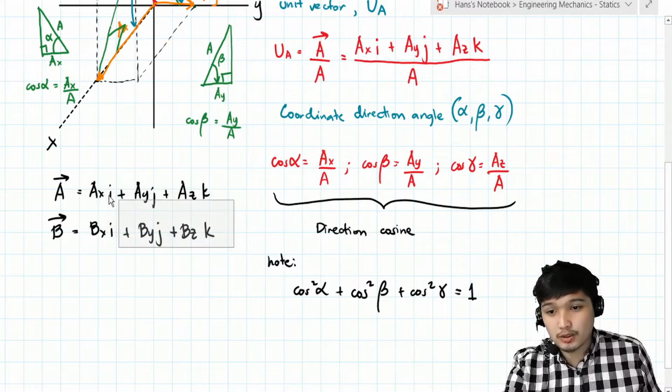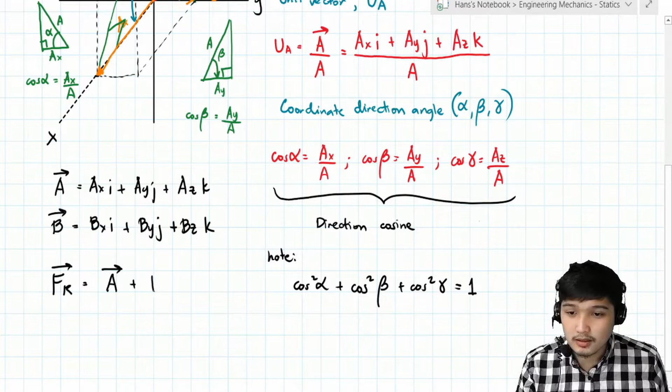And, kung may dalawang force, para makuha natin yung resultant force, so tawagan natin yung FR, is just equal sa vector summation ng mga forces natin. So, magiging A plus B. So, para ma-add yun class, meron yung I plus J plus K. So, dito, sama lang natin lahat ng forces along X, itong mga Ax saka Bx. Dito, lahat ng forces along Y, Ay, By. And then dito, sum lang natin lahat ng forces along Z, yung Az saka Bz. So, yun na yun, class. This vector now represents yung ating resultant force.

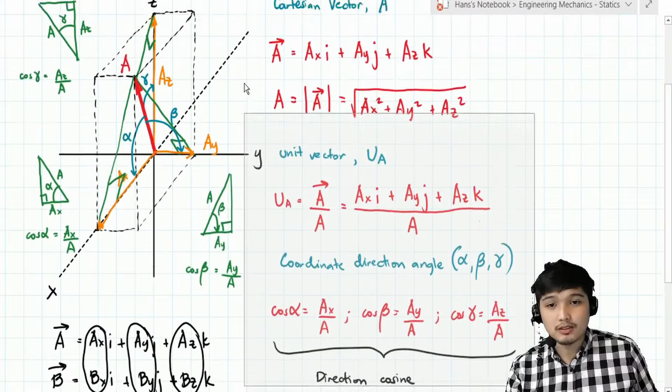Okay, so, almost the same lang, no? Yun nga lang, nagkaroon lang tayo ng analysis and presentation using vectors. Okay, so nagets ba class? Nakasunod? Okay, so kung nakasunod, we're ready na to apply this concept sa ating sample problems. Okay, so ayan, situation 9. From the figure shown below, express the force as a Cartesian vector in Newton and determine the coordinate direction angles of the force. So, zoom in tayo, class.

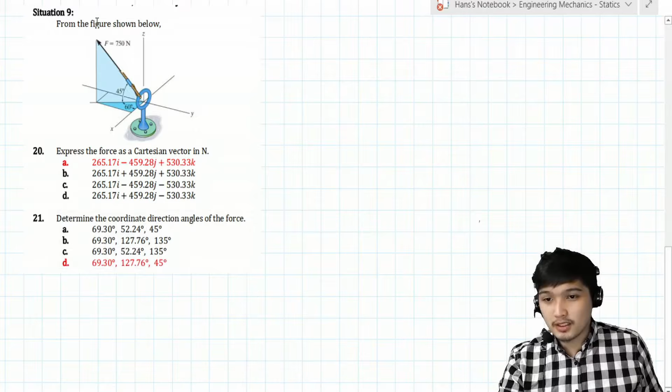So, take note, class, yung mga angle provided dito does not represent yung coordinate direction angle. So, wait lang bago tayo pumunta doon, kunin muna natin yung mga components niya. So, kung ito yung total force natin, yung components niya is ito. Ito yung Fx. Andito yung Fy. And then, somewhere here, andito yung Fz. Yung Fz na yan is yung height ng triangle. Tapos ito naman, dimension ng horizontal triangle, ito yung Fy. And then, dito sa likod, ito naman yung Fx.

So, we can solve individually yung mga components na yan. So, simula tayo saan, class? Sa Fz siguro, no? So, paano kukunin yung Fz? Consider mo tong triangle na nakatayo, with given angle na 45. So, therefore, papuntang positive z-axis. So that is 750 sine of 45. So with that, ilan ang Fz? 530.33. Pwede na yan.

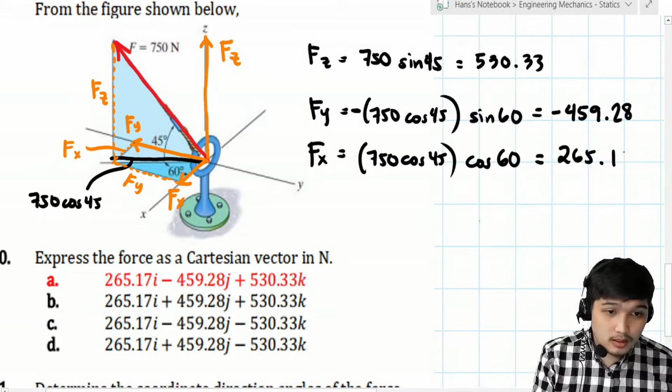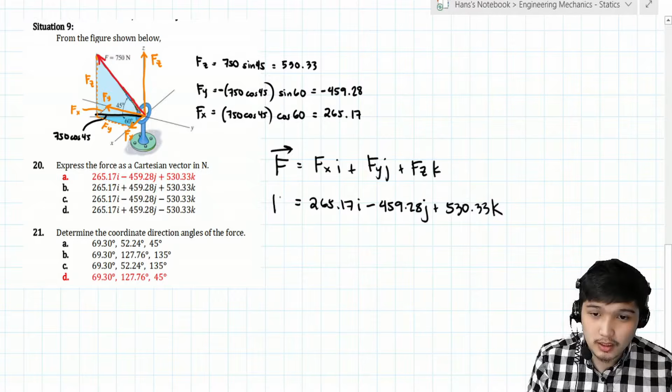I hope na nagets niyo yan, yung ginawa natin. So, therefore, the Cartesian vector ng force F ay equal saan? Fx i plus Fy j plus Fz k. So, just simply plug in yung values. 265.17 i and then minus 459.28 j and then plus 530.33 k. So, this one now is our Cartesian vector and this one is letter A.

Letter A. So, correct. So, next we have determine the coordinate direction angle. So, di ba class, pag kinuha natin yung unit vector nung F, ano mangyari doon class? That is yung Cartesian vector then divided by yung magnitude ng force F. Okay? Or in numerical value, kunin lang natin to, then divide it by the magnitude ng force F. Ang magnitude is 750 over 750.

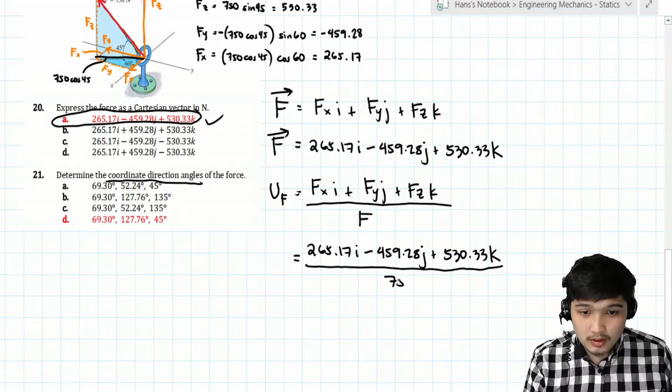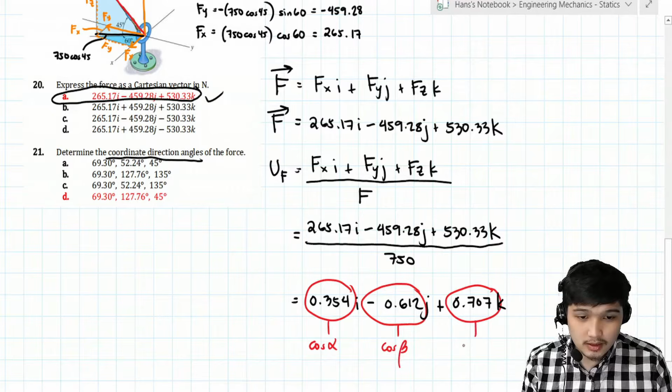So, simplifying this one, magiging 0.354 i minus 0.612 j and then plus 0.707 k. Okay? And then note, 'di ba sabi natin sa previous discussion that yung mga values presented dito represents yung direction cosine. So this one represents cosine alpha. This one represents cosine beta. And then ito represents cosine of gamma. Tama ba? Kadi-discuss lang natin kanina. So yung mga individual values, equal sa cosine.

So dito. So with that, kaya na natin kunin yung mga values ng alpha, beta, saka gamma. So alpha equals arc cosine of 0.354. Check na natin, marami na tayong rounding off na ginawa eh. Malapit pa ba sa choices? So this one is 69.27. Okay, so lahat sila pare-parehas pa nung alpha. So punta tayo sa beta. Beta equals arc cosine of negative 0.612. Beta equals 127.73 degrees. So mukhang ito na yung tumutugma, yung letter D. Pati pala yung letter B, pwede pa, lumalaban pa.

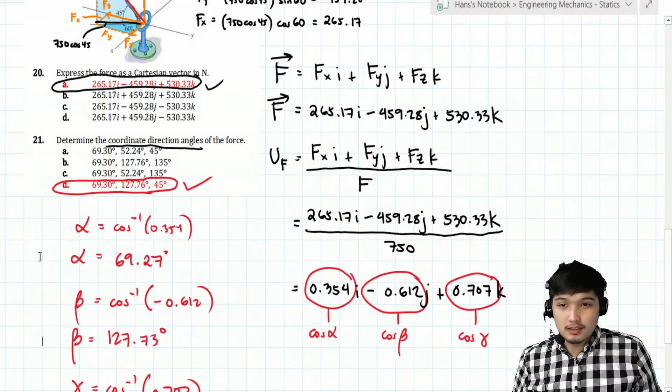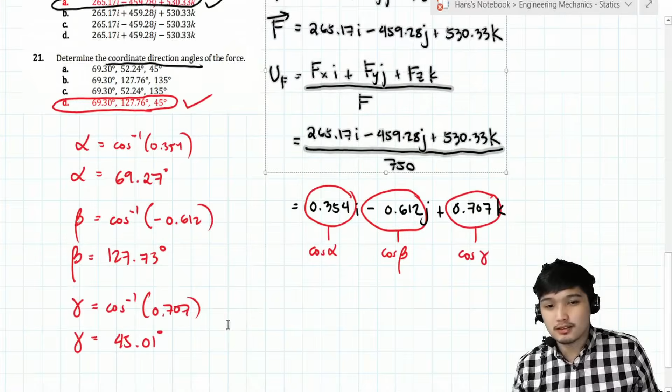So no choice, kunin natin yung gamma. So gamma equals arc cosine of 0.707. Gamma equals 45.01. So with that, we can say that the correct answer is letter D. So correct. Nagets niyo ba yung ginawa natin, class? Isang force pa lang yan, conversion ng force dun sa equivalent vector niya, saka yung mga direction angles niya. So, proceed tayo sa next problem.

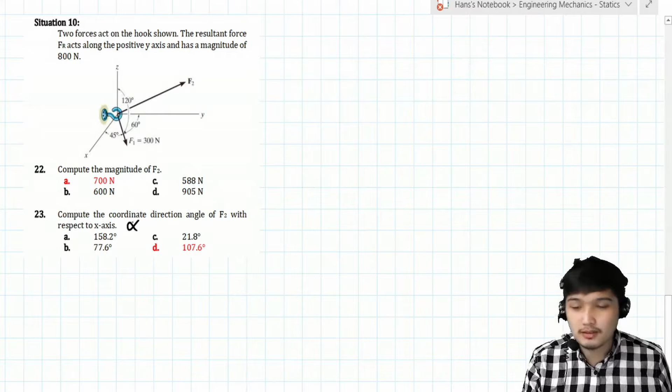Okay, so situation 10, two forces act on the hook shown. The resultant force Fr acts along the positive y-axis and has a magnitude of 800. Compute the magnitude of F2. Compute the coordinate direction of F2 with respect to x-axis. So, ang tinatanong dito sa 23, yung with respect sa x-axis, yung alpha. So, zoom in tayo.

Yung F1, may value siya. Meron din siya mga direction angles. So, from x, check. From positive y, check. From positive z, check. Ito yung alpha 1, beta 1, saka ito yung gamma 1. Okay, so very simple, mape-present natin yung F1 into its equivalent Cartesian vector. So, gawin nga natin yon. Paano makukuha class? Kunin muna natin individually yung mga component. So, yung F1x equal saan?

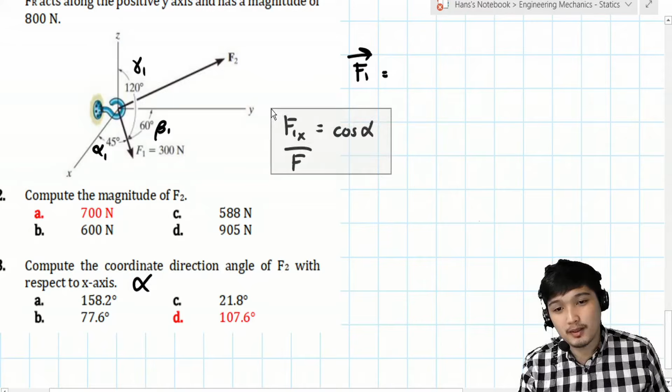Since may mga given tayong angle, pwede natin gamitin yung cosine. Recall that cosine is equal sa component over the magnitude. So, yung along x equal sa cosine alpha times F. Di ba originally, over F. Nare-recall nyo pa ba? Balikan nga natin. Ayan, cosine is equal sa component over the magnitude ng total force. So, ganun din dito. For alpha, component over total force. Kaya itong force, lipat na lang natin dito. So that is 300 cosine of 45.

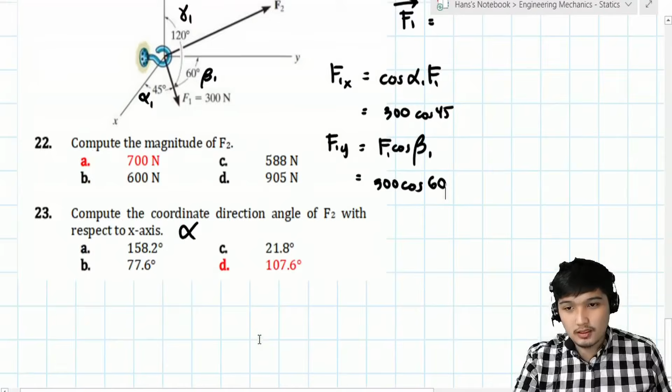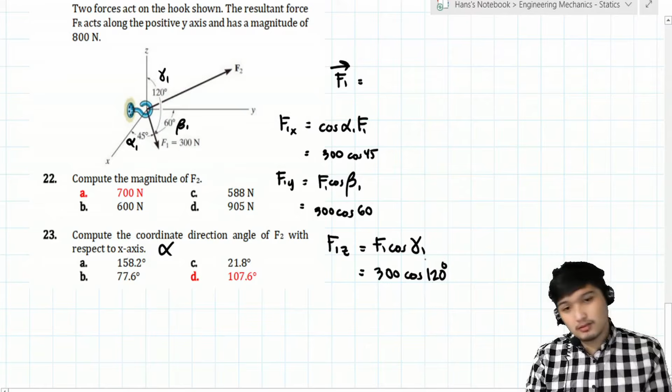Okay, so for F1y, that is F1 cosine of beta 1. So magiging 300 cosine of beta 1, 60. So next, z component, F1z. That is F1 cosine of gamma 1. So that is 300 cosine of 120. Okay, wait lang.

Ayan. So therefore, para masolve natin yung Cartesian vector niyan, that is equal sa F1x i plus F1y j plus F1z k. So therefore, F1 equals 300 cosine of 45 i plus 300 cosine of 60 j plus 300 cosine of 120 k.

Okay, tapos yung F2, wala naman kasing given sa F2. So yung F2, sulat lang natin siya ng ganito. Imaginein natin meron siyang mga component: F2x component i, plus F2y component j, plus F2z component k. Hindi kasi natin alam yung mga components niya.

Ngayon, ano yung sinabi sa ating class sa problem? Ang sabi sa atin is that the resultant force acts along the positive y-axis and has a magnitude of 800. So parang pag pinagsama mo yung F1 saka F2, ito yung combined effect nila. So ito yung FR, which is directed towards positive y-axis, 800 Newton. Ibig sabihin class, kung i-present natin yung FR into its equivalent Cartesian vector: 0i plus 800j plus 0k.

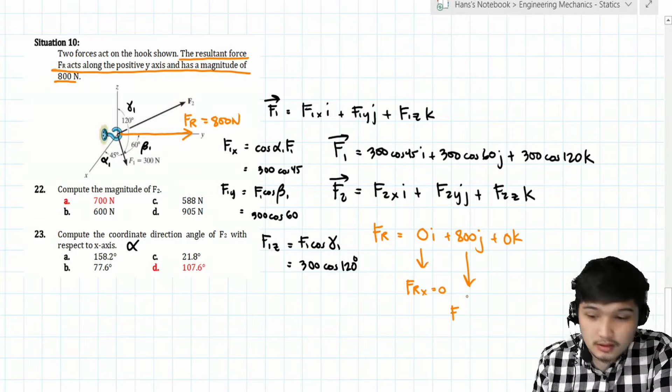Gets ba? Kasi sinabi nga, di ba, ito ba't nag-0 to? Kasi wala nga siyang x component, di ba, na yung FR along x is 0. Walang sinabi. Pero ito kaya naging 800 kasi, nakikita pa ba yung sinusulat ko? Yung y component nung resultant force is exactly 800, no? Kasi nga towards dun siya, dun siya papupunta. And then yung z, alam mo na rin, di ba, dahil yung z component wala, so 0.

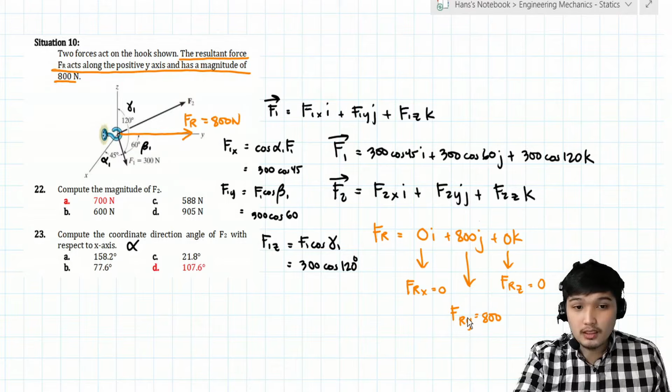Okay, so yun na yung class, no? Sana nakakasunod pa kayo. Medyo masakit lang sa mata, lalo na class kapag hindi tayo praktisado na nag-vector. Kasi commonly nakikita natin class 2D forces lang. Pero minsan pahirap si examiner eh, so what if maka-encounter ka ng 3D force? So mas maganda, alam mo na kung paano ginagawa.

Okay, kakalmahan mo lang class kapag ganyan para hindi tayo prone sa error. So sabi natin, para ma-solve yung resultant, equal yun sa vector summation, parang F1 plus F2. Parang ito yung sinabi natin kanina kapag may two forces na, A and B. So para makuha yung resultant, vector summation ng A and B, at para makuha yon, sum mo lang lahat ng X individually, sum mo lang lahat ng Y individually, sum mo lang lahat ng Z individually.

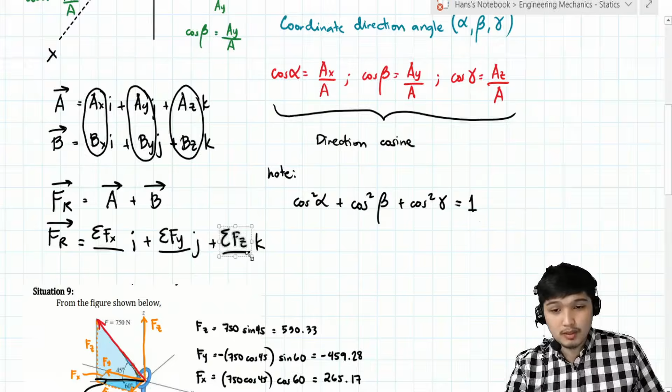So in that case, parang lumalabas dyan class, kung titingnan natin itong sinulat ko dito, so focus kayo dito. Dapat yung sum neto, pag pinag-plus ko yan, dapat equal yan sa 0. Pag pinag-sum ko to, dapat equal yan dito. Then also this one, equal yan sa 0. Okay, so yun na yung clue natin, no?

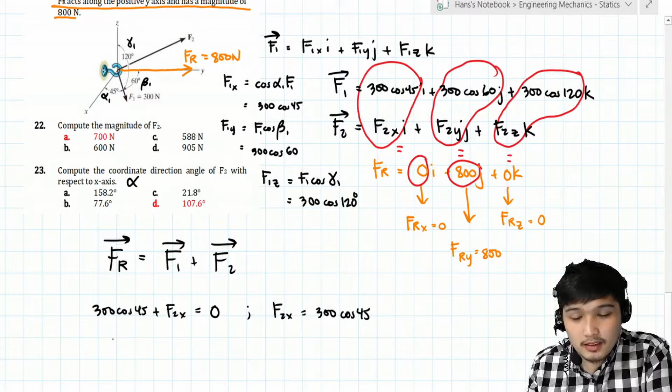So for the first part: 300 cosine of 45 plus F2x dapat 0. So therefore, F2x equals negative 300 cosine of 45. Next one: 300 cosine of 60 plus F2y dapat equals sa 800, so F2y now equals 800 minus 300 cosine of 60. And then lastly, 300 cosine of 120 plus F2z dapat maging 0, so therefore F2z equals negative 300 cosine of 120.

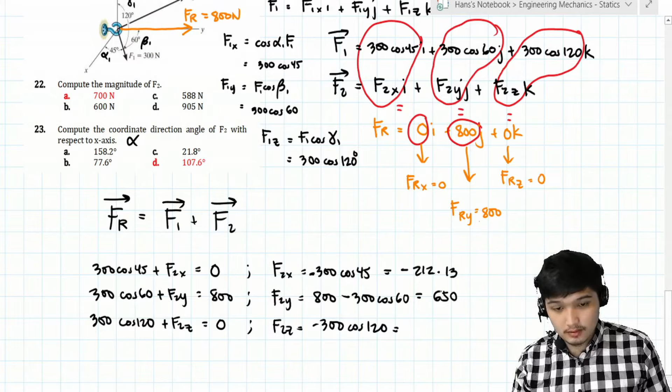So gets ba yan? So with that, kunin na natin class yung value nito, simplify na natin. Ilan yung mga components along x and y and z ng force F2? Itong una dapat may negative, so negative 300 cosine of 45, negative 212.13. Ito ilan? Magiging 650. Ito is 150. Okay, so nasolve na natin individually yung mga components niya, no?

So therefore, we can rewrite yung Cartesian vector F2 equals sa negative 212.13i plus 650j plus 150k. So para makuha yung magnitude ng F2, absolute value ng vector F2 or yung Pythagorean: negative 212.13, 650 squared plus 150 squared. Ilan yung magnitude niyan, class, F2? Okay, so sagot is 699.999, or dahil sa rounding up lang yun, siguro yung sagot dyan is exactly 700 newtons.

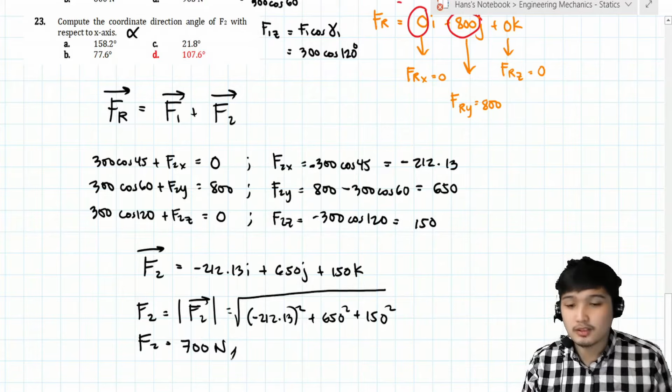Okay, so nasa choices ba yan? Okay, so correct, letter A, correct.

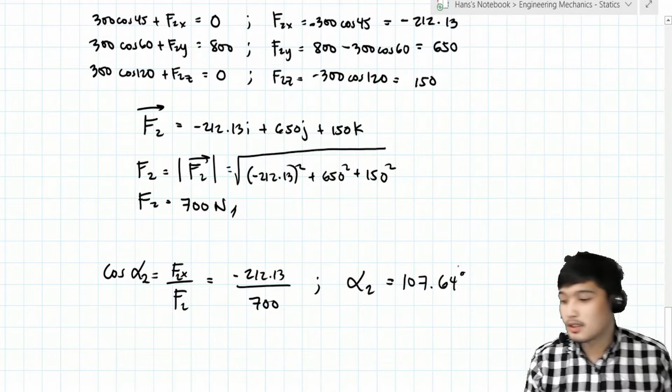Next, compute the coordinate direction angle or with respect sa x-axis. So tinatanong nga itong lambda or yung alpha. To solve for the alpha, note that cosine of alpha equals sa fx over yung force. Kung halimbawa, ang tinatanong is yung alpha nung force 2, so F2x over F2. Simply kunin lang natin yun: negative 212.13 over 700. Using that one, we can solve for the alpha 2, that's equal sa 107.64 degrees. So nasa choices ba yan? Okay, 107.6, so we are correct.

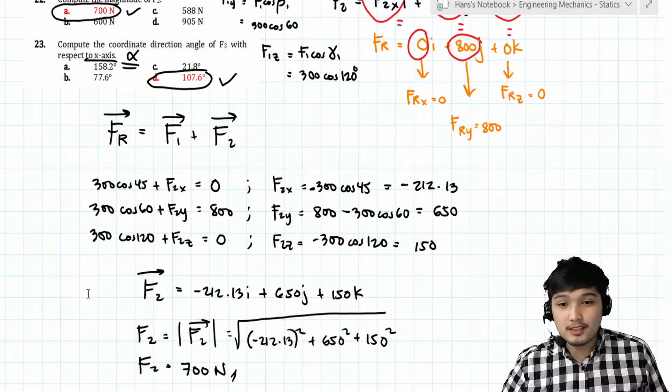Okay, so yan, nandiyan pa ba kayo? So ang hirap nun ng 3D. Pero ayun lang class, practice lang ng practice.

Okay, nandyan pa ba kayo? So practice lang natin, no? Di ba hinahanap natin yung B. So solve for B, that is what? C minus A. So simply, i-model lang natin to sa calculator, sa vector.

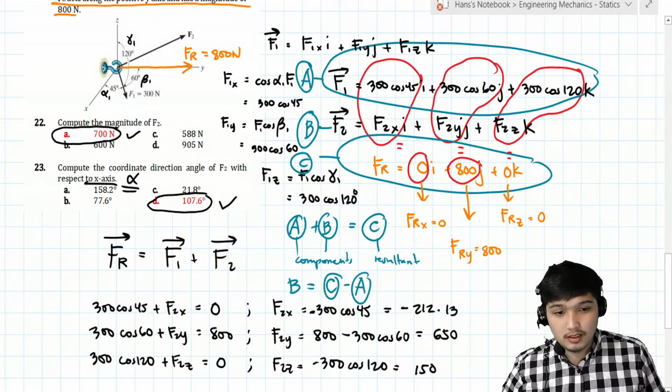Sige, i-adjust ko lang tong screen ko.

So ano tayo? A vector, so that is A, so vector A tayo. Makita mo yung vector class hanggang 4 lang. So vector A represents yung force 1.

At saka lagyan natin 300 cosine of 45. Ito, 300 cosine of 60. Ito is 300 cosine of 120. Okay, so that is vector A.

At tapos yung resultant, dito tayo sa vector C, sa 5. Ay teka lang, dito sa data, vector C, at saka 1. So sabi natin, 0 component along X, 800 component along Y, 0 component along Z.

Okay, so therefore, subtract na lang natin, no? C minus yung A. So ilalabas na yan, class, no? Yung sagot natin kanina, nandito na yan: 212, 650, saka 150. Tama ba? Ayan, no? 212, 650, saka 150.

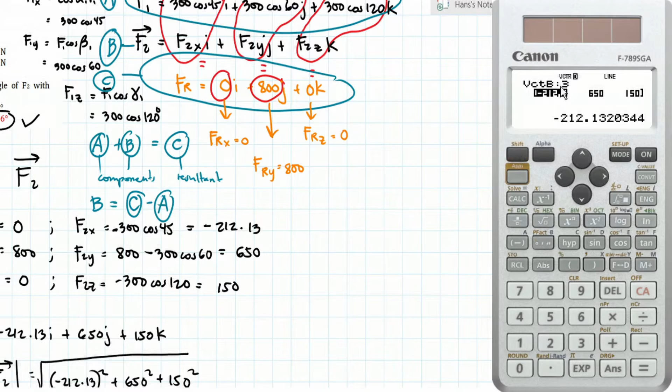Alam ko, class, pwede itong i-rectang store sa B. So try nga natin, shift store B. Ayan, no? Nasa vector B na siya.

Okay, so di ba class, gusto natin kunin yung, halimbawa, ito, yung magnitude. So para makuha class yung magnitude, anong gagawin? Sabi, pag calculator gagamitin, absolute value, so para siyang absolute value ng vector B. Ayan, no? 700, no? Nakuha na natin yung magnitude.

So next, ito. Paano makukuha to, class? Pwede natin gawin dito class, kunin natin yung unit vector. Okay, we said that the unit vector, let's say nung F2, ay equal yun saan? Sa Cartesian vector niya over yung magnitude niya.

Or kung sa calculator yan, para yung 'di ba ito nasa to? Vector B, at tapos itong magnitude parang to, yung absolute value ng vector B. Okay, so makakapag-present tayo ng unit vector. So ayan, sana nagigets nyo.

So more on syntax lang naman eh. So wag mo tatandaan yung syntax class, kasi ang tatandaan mo yung konsepto, saan ba nanggaling yan. So yung sa taas, Cartesian vector, yung denominator, yung magnitude.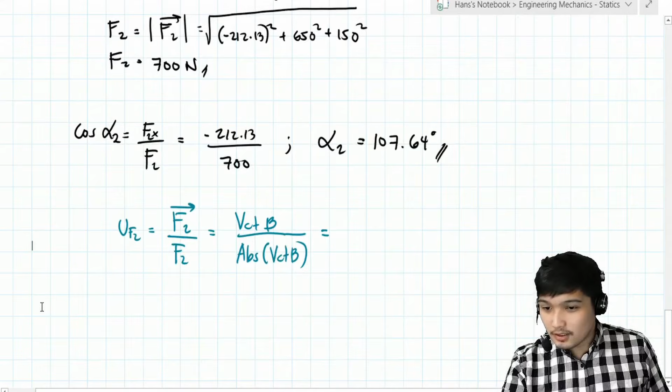So yun, using even yung ibang values doon, masolve pa natin yung iba pang hinahanap na angles. Okay, so yan. Nag-guess nyo ba? Or na-appreciate nyo ba yung ginawa natin sa calculator? Okay, so next tayo class, tingnan natin kung gets natin. Okay, so ito.

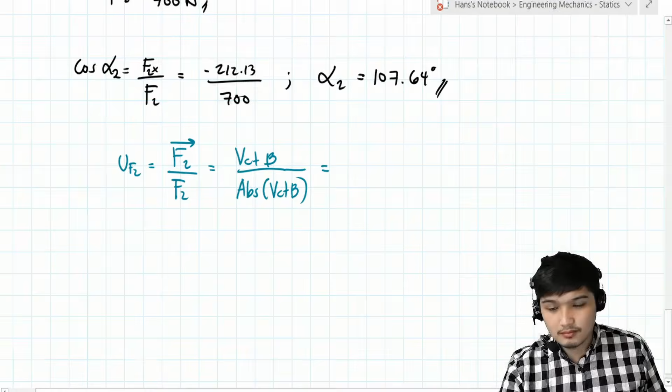Situation 11. From the given pipe assembly as shown, so there are two forces, F1 at F2. So tinatanong calculate the magnitude of the resultant force. Then calculate the coordinate direction angle ng resultant force. So para makuha natin yun, class, simple lang, yung resultant force FR, just simply the vector summation ng F1 and F2.

So therefore, una natin munang kailangan gawin is i-present yung mga Cartesian vector nila. So yung F1, paano yun class? Parang yung F1, meron siyang, so palit na tayo kulay, meron siyang X coordinate or X component, at meron siyang Z component, no? Pero wala siyang Y. Tama ba? So alam mo na yung class, paano kunin yung niya?

Yung X component, so rerekta ko na dito yon. So that is 600 times 4/5. Tama ba? And then towards the positive x-axis, so positive, at lagyan natin ng I. At tapos plus, wala siyang Y component, so 0J. At tapos meron siyang Z component pataas, so that is plus ulit, plus 600, at tapos that is 3/5 naman, at K. O yun na yun class, nasulat na natin yung Cartesian vector nung force F1.

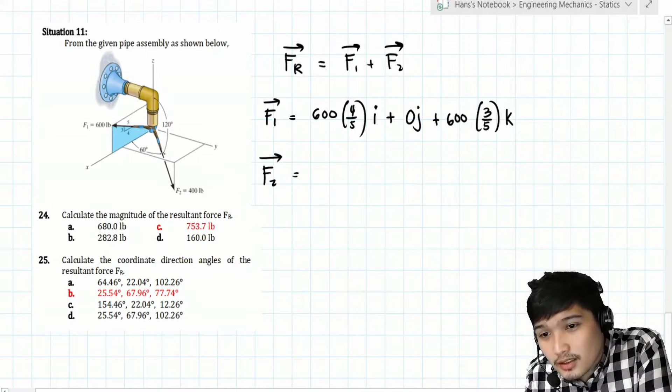Next, F2. O paano yan? So in that case, ang mga given sa kanya class, is zoom in tayo. So di ba parang etong 60, ito yung niya, angle with respect sa x, so para siya yung alpha. Etong 120, siya yung angle with respect sa z, so siya yung gamma. O anong nawawala, class? Wala siyang angle papuntang y. Wala siyang beta. Paano kaya yung class walang beta?

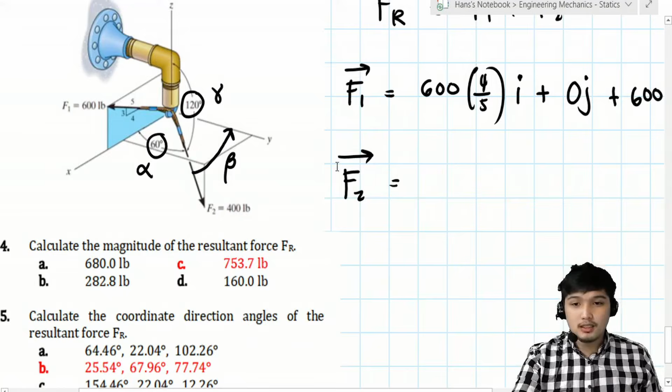So recall again that the relationship is what? Cosine squared alpha plus cosine squared beta plus cosine squared gamma equals sa 1. So simply plug in lang natin. O ilan yung magiging ano niyan, beta? Okay, so ganun pala masasolve, no? Una kala mo susuko ka na, ay kulang yung given. Ay hindi class, kailangan alam mo tong ano, yung relationship ng mga angle. So ilan yung ano niyan, class? Beta niyan.

Okay, so lumalabas yung angle beta is 45 degrees. So therefore, pwede na nating i-present yung force F2 into its equivalent Cartesian vector. Yung una, para sa x component, that is yung total force and then cosine alpha 60. Saan siya papunta, class? Papunta siyang positive x-axis. Hindi mo na kailangan isipin yung class kasi yung magde-determine nun yung angle na. Siya na mag-state kung positive value or negative value, so long as yung angle na provided mo is yung mga angle measured from the positive x, positive y, positive z.

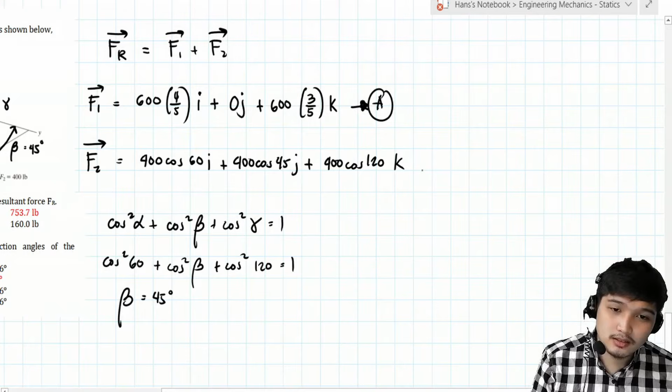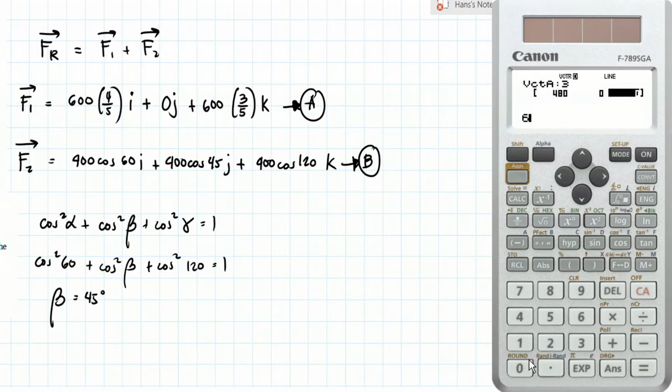So sige, punta tayo sa calculator. Apps, data 1, at baguhin natin, gawin natin 600 times 4/5. Ay, hindi pala nakikita yung pinipindot ko. Ito na. So balik na tayo. Vector, 600 times 4/5, 0, 600 times 3/5. Okay, next vector B, 400 cosine of 60, 400 cosine 45, 400 cosine 120.

Okay, so just simply add the vectors, vector A plus vector B. So whatever yung value represents yung resultant. So ano ba yung mga tinatanong dito? Magnitude. Okay, di ba ginawa natin ito, parang ito yung sa C is equal sa A plus B. So na-store na ba natin sa C? Store muna natin, or naka-store na. Hindi ko ma-recall, ulit natin, store sa C, para sure. Okay, so para makuha yung magnitude, paano gagawin? Absolute value ng, wait lang, labas tayo dyan. Absolute value ng vector C. Okay, so the sagot is 753.7. So that is letter C.

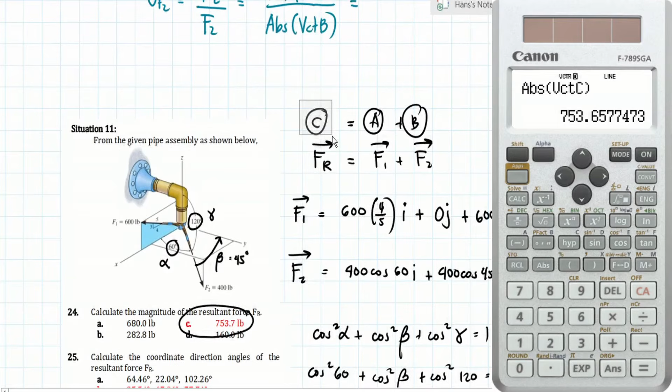O bakit naging ganyan? Kasi di ba sabi natin unit vector equals sa Cartesian vector niya yung force C natin over yung absolute value. So wait lang, bakit naging C? Kasi nga in-store natin sa C ito. Okay lang, baka nalilito kayo ha, so palitan nga natin to. Yung unit vector nung resultant, ay equal sa Cartesian vector nung resultant over yun sa magnitude nung resultant. Where in that case, yung Cartesian vector ng resultant is ni-store natin sa C, vector C, and then yung magnitude niya is equivalent sa absolute value nung vector nung nasa C.

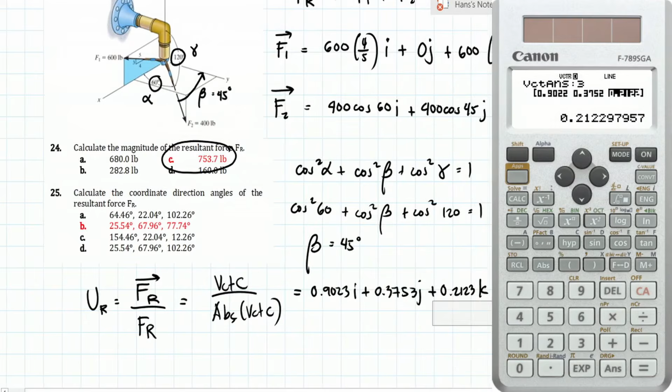So, in that case, makaka-generate tayo ng vector na magre-represent ng mga direction cosine. So, gawin natin yan. Vector C divided by absolute value ng vector C. Okay, so sulat lang natin yan: 0.9023 I plus 0.3753 J plus 0.2123 K. Ayan, di nakita. So, I think pwedeng hindi ko na gamitin yung calculator.

So, sabi natin, yung unit vector represents, di ba? Itong una, yung cosine of alpha. Ito is cosine of beta, and then ito is cosine of gamma. So therefore, we can solve for individual alpha, beta, and gamma. So, kaya nyo na yan, class, no? Arc cosine mo na lang isa-isa. So, arc cosine of 0.9023, this one is 25.54. Next is arc cosine of 0.3753, so this one is 67.96. And lastly, 0.2123 ay 77.74 degrees. So therefore, from the choices, ang tumugma dyan is yung letter B. Okay, so that is now our answer.

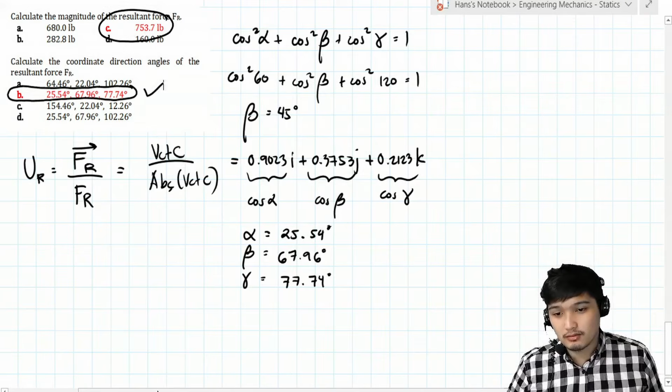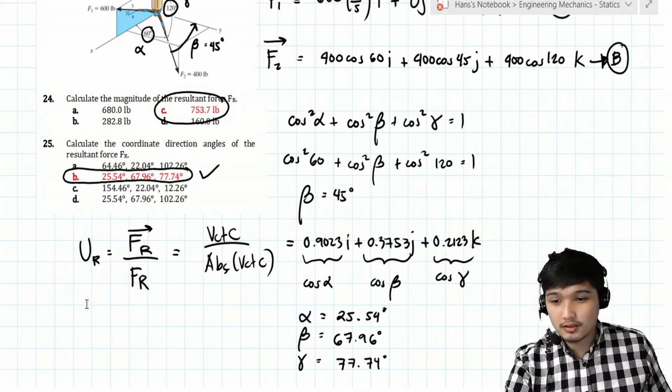Okay, so nakakasunod ba kayo, class? Medyo, talagang completely different no yung atake ng pagso-solve sa mga 3D forces, unlike sa 2D na medyo simple lang siya, no? So ito kailangan ng focus at kailangan alam yung mga konsepto. Okay, so hopefully nakakasunod kayo, guys. So I think last problem na tayo regarding sa 3D forces, concurrent 3D forces. So, copy ko lang. Wait lang, guys.

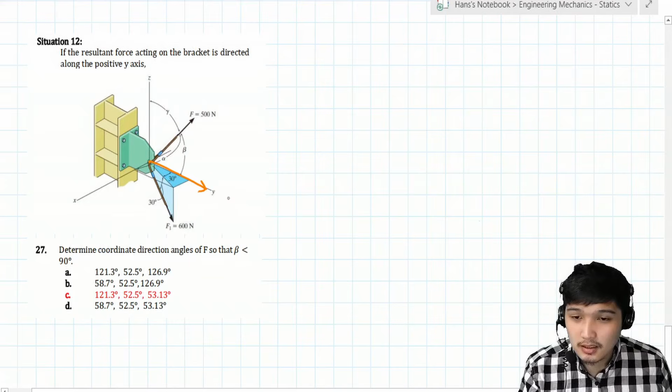So, anyways, last problem na to. Situation 12, if the resultant force acting on the bracket is directed along the positive y-axis. So ang resultant niya is papuntang positive y. Ito yung FR. Yung vector niyan is 0i kasi wala siyang x component, plus j component which is yung summation ng mga forces along y, plus 0k kasi wala rin siyang z component. So ginawa lang natin yung Cartesian vector representing yung resultant force.

So tinatanong is what? Natakpan. Wait lang. Nasaan yung tanong? So, ito yung kompletong tanong. Una, determine the magnitude of the resultant force FR, and determine the coordinate direction angles of F so that beta must be less than 90 degrees.

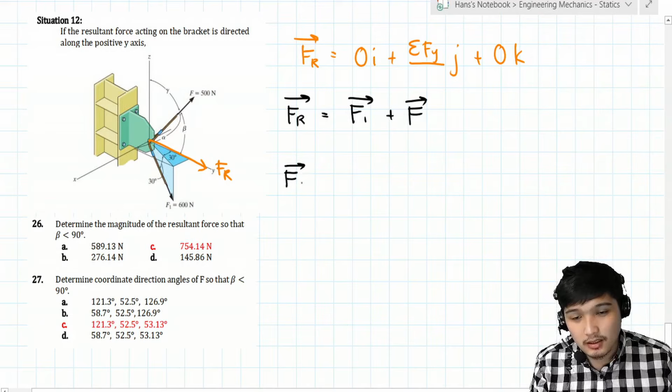Simplihan lang muna natin. Para makuha yung resultant, that is just the vector summation ng F1 plus yung isa pang force na F. May dalawa kasing force, F saka F1. Para ma-solve natin, i-present natin yung mga Cartesian vectors nila. Para sa F1, check natin tong figure. Meron ba siyang x component? Meron, ito yung x component ng F1. Paano kukunin yun?

So, 600. Yung line na to equals 600 cosine of 30 considering the figure. Para makuha to, 600 cosine of 30 tapos another 30, which is sine 30. This one is i, positive kasi towards the positive x-axis. Next, yung papuntang y. Imagine mo lang kung saan papunta yung force. Andito yung y component. To solve for that, kailangan natin tong line na to and then 30 ulit, which is cosine naman. So plus 600 cosine of 30 times cosine of 30 j.

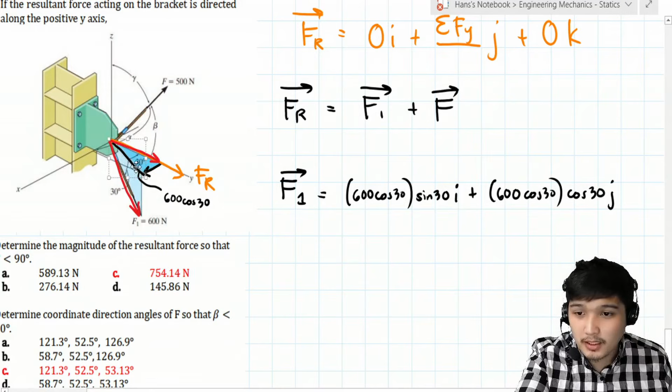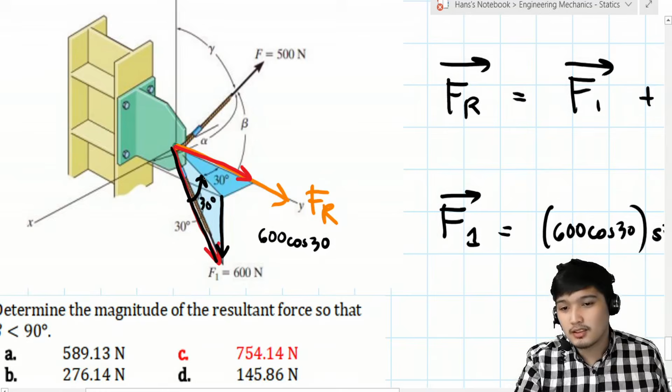And then meron siyang z component which is pababa. Ito yung z component niya. That is negative. Delete ko lang to. Oops, nawala. So ito yung z component niya, downward, negative. Para makuha yan, that is 600 sine netong 30 degrees. Sana nasundan guys. So minus 600 sine of 30 k.

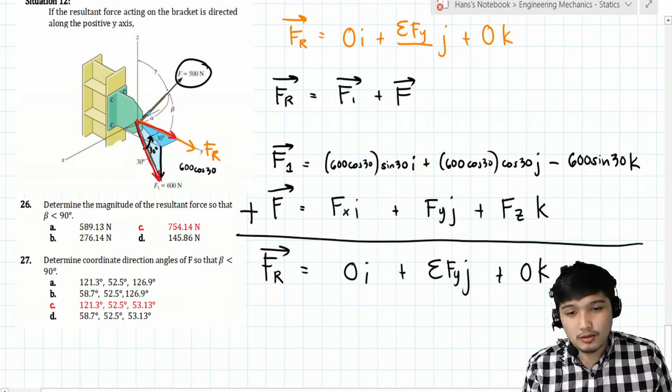And then let us represent yung F, walang F2, since wala siyang given na direction. So simple as Fx i plus Fy j plus Fz k. Ano yung gusto kong palabasin? Kapag pinag-plus mo sila, magiging equal sila sa Cartesian vector nung resultant na 0i plus summation ng Fy j plus 0k. So from that, we have a clue na gagamitin natin tong una para makuha yung x component.

So simplify natin to. Medyo mahirap pag mahaba pa yung sinusulat. This one is 259.81. This one is 450. This one is negative 300. First part, lahat ng i. 259.81 plus x component ng force F dapat 0. Therefore, yung x component ng force F is negative 259.81.

Next, ito namang mga j. Summation: 450 plus yung y component equals, wala pa tayong value, pero that represents yung summation ng mga Fy. So wala tayong magagawa dyan. Next, sa last na tayo, sa k.

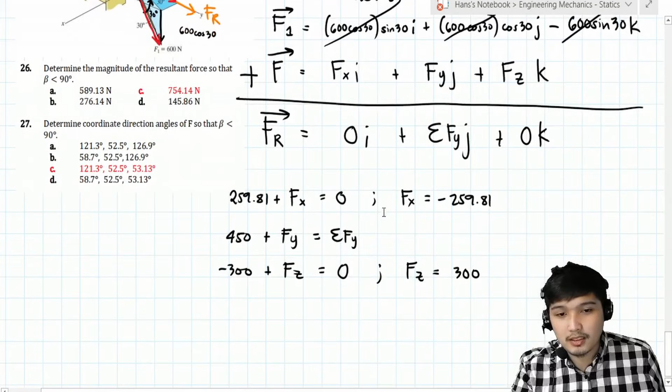So, ano kayang pwedeng maging clue? Hindi pa natin ginagamit itong 500. Okay, I think pwede natin gamitin yan in relation dito sa Fx saka Fz. So, note that cosine alpha equals Fx over F. Tama ba? So, para siyang negative 259.81 over 500.

So, therefore, kaya pala nating i-determine yung coordinate direction angle niya with respect sa x-axis. So, ilan yan? So, ito is 121.31 degrees. So, the same with the gamma, that is Fz over F. So, 300 over 500. So, masolve natin yung gamma. So, ilan yan?

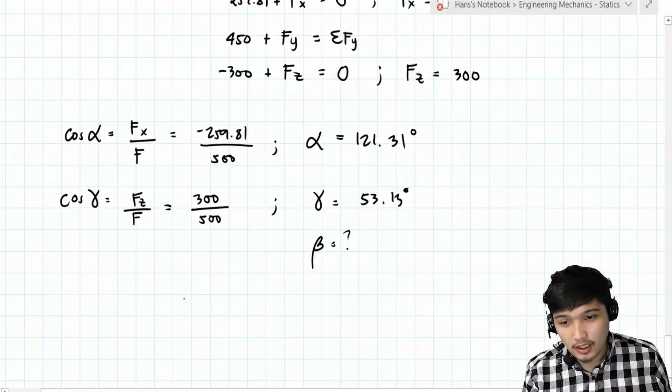So, that is 53.13 degrees. So, ibig sabihin class, kung may dalawa na tayong angle, kaya na natin kunin yung third na angle, yung beta. Saan natin kukunin yung beta? Using yung relationship cosine squared alpha plus cosine squared beta plus cosine squared gamma equals 1. Take note lang class, dapat yung beta niya must be less than 90 degrees.

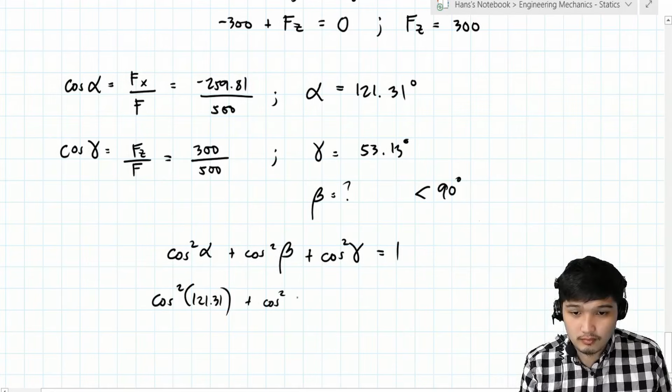Okay. So, ang nakuha kong values is 52.53 or 54, pwede na yan. Or yung isa is 127.46. So, sabi nga, gusto niya yung beta less than 90. So, ito yung gagamitin natin.

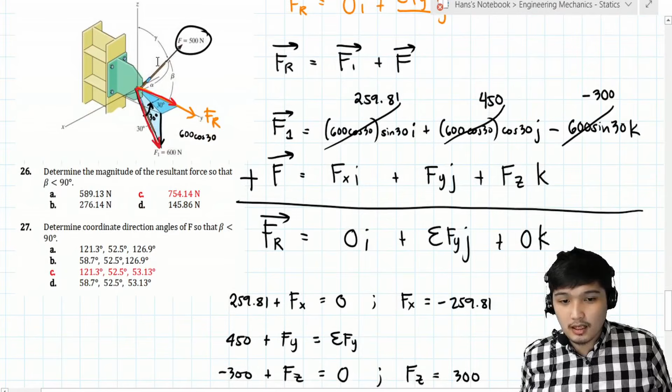So, class, kung may beta na tayo, kaya na natin kunin itong y component ng force F. So, paano? Recall that cosine beta equals Fy over F. So, Fy equals F cosine of beta. Yung F niya is 500, and then cosine of 52.54 degrees. So, makuha na natin yung missing value na Fy.

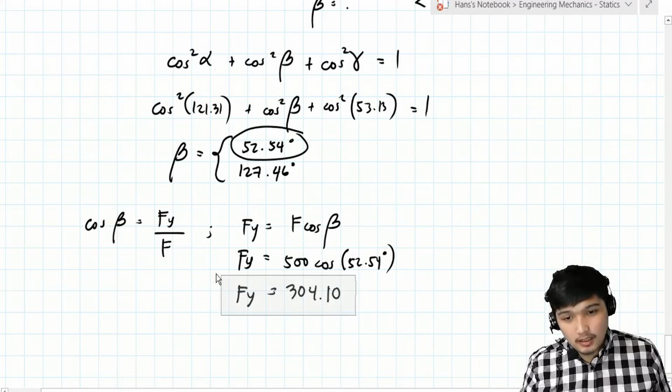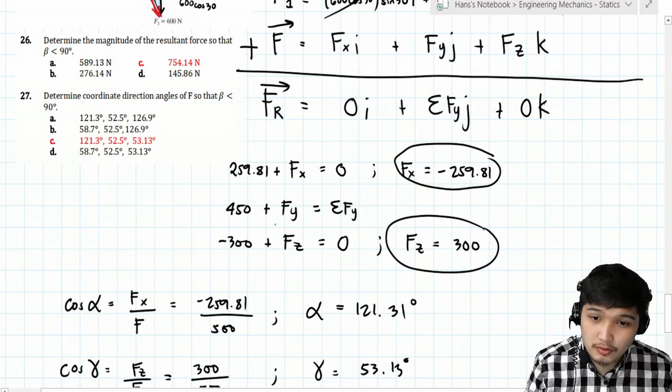So, para pala siyang 450 plus 304.10. Okay, so therefore, yung summation ng Fy ngayon for this one ay equal sa 754.10.

Gets ba? So, pwede na natin itong palitan. Ibig sabihin yung middle term, pwede natin siyang palitan ng 754.10. Kung ito na yung Cartesian vector for the resultant force, ilan yung magnitude niya? Wag mo na i-calculate kasi 0 yung iba. Yung magnitude niyan is 754.10. May rounding discrepancy, pero yun na yung sagot, 754.10, magnitude of the resultant force.

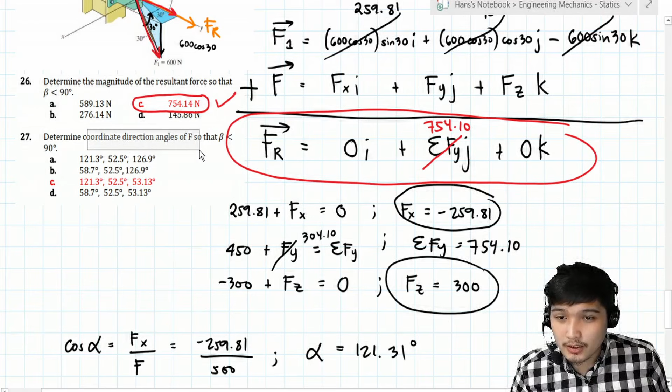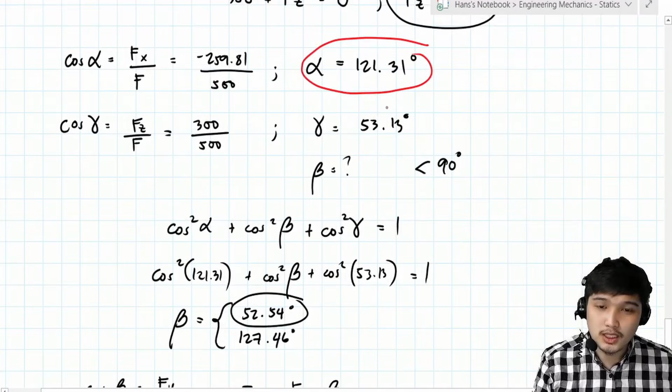And also, nasagot na natin itong next: determine the coordinate direction angles of F. Nakuha na natin yan. Yung alpha 121, gamma 53, and then yung beta 52. So, 121.3, yung gitnang term 52.5, and then yung last term 53.13. So therefore class, nasolve na natin lahat.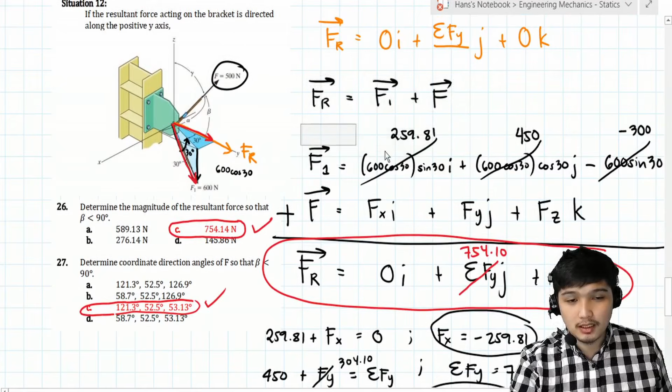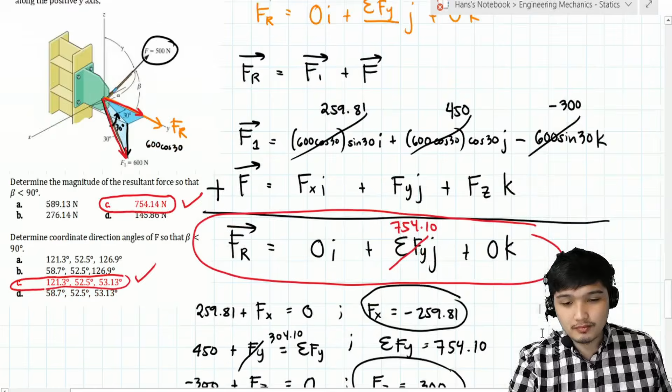Okay, so yun na yung discussion natin regarding sa 3D forces. Hopefully nakasunod ka. Wala namang kinaiba to, vector sum lang, so long as marunong ka mag-present ng mga Cartesian vector ng mga individual forces natin. Tapos yung summation niya, almost the same na lang. Okay na tayo dito.

So, next topic natin is about mga ibang forces naman: parallel force system, non-concurrent forces, and 3D parallel forces. Mahaba-haba pa to bago tayo makapag-proceed sa moment. So, class, I suggest i-master mo muna yung pag-generate ng mga vectors kasi gagamitin natin ito later sa moment ng forces, lalo na kapag 3D. Kung ang pagkuha ng resultant in 3D medyo mahirap na, mas mahirap yung pagkuha ng moment of force in 3D kung hindi mo na-master tong topic na to.